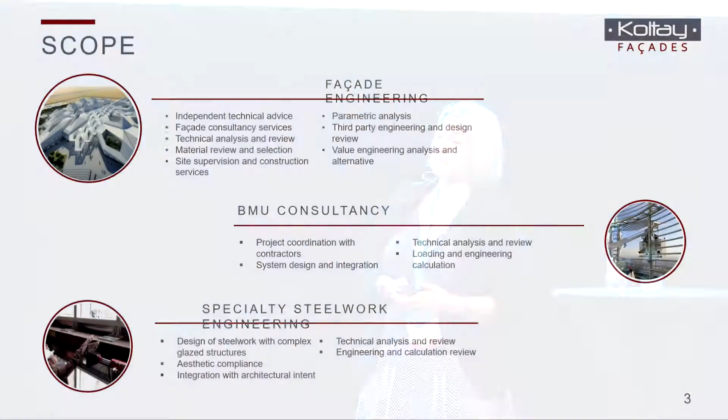Sorry, this one, Skyview. I will talk about this building today in detail. We provided full-scope facade engineering and facade access consultancy scope on this project, and this is the core business of our company. This is what we do and nothing else.

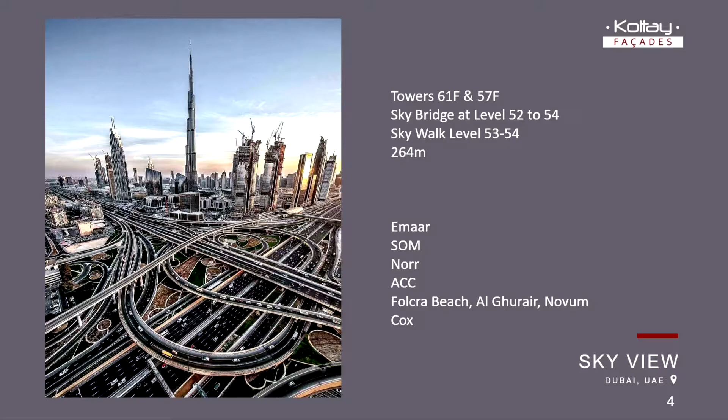Skyview is a 264-meter tall twin towers. The concept design is from SOM. The local architect was Norr, and it's an Emaar project in Dubai. It consists of 2 buildings and a giant skybridge which connects them at level 52 to 54. Our involvement on this project runs from 2013 until today. The building will get handed over at the end of this year.

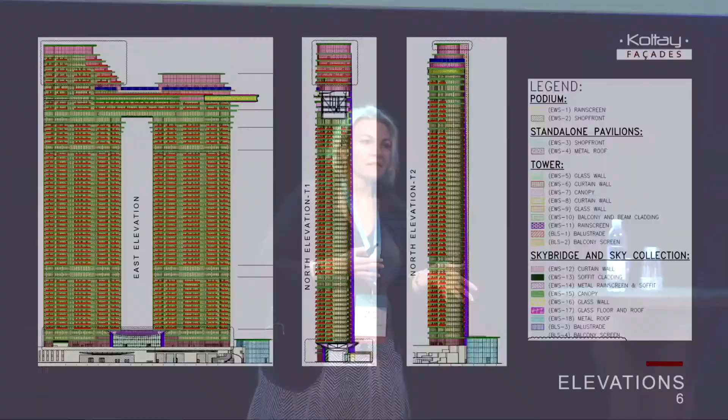How we approach every project at the beginning, we look at the whole facade and categorize it to system types. So typically on a tower building, we have like 4 to 8 system types to work with. This building, because of the magnitude of it, the complexity of it, the skybridge, the tourist feature, Skywalk on it, the car showroom next to it, the podium part, we have a lot more systems to work with.

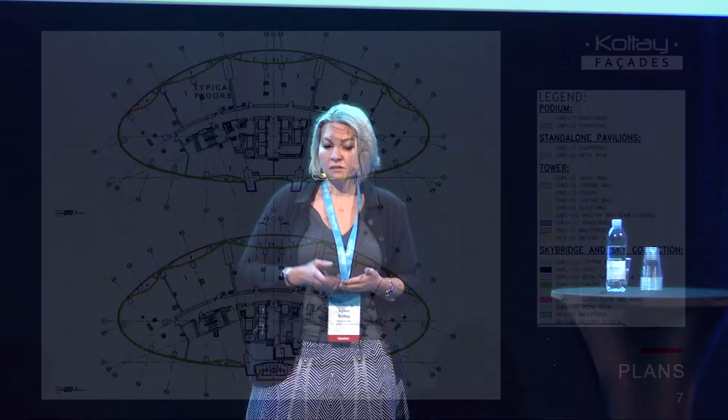This is a typical floor plate. You see little balconies eating into the floor plate. I will talk about these very narrow balconies here in a minute. This is the tourist feature. It's a glass-floored skywalk. Tourists can go and have a view on the observation deck.

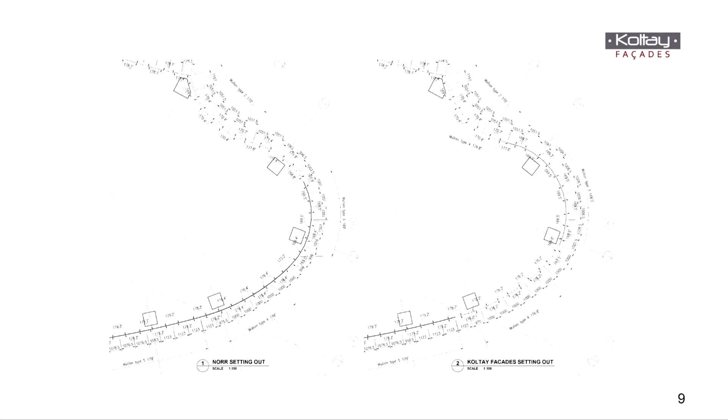This is another optimization exercise that we did at the beginning of the project, and we tend to do it on every project, to look at the modulation and to see how it fits with standard size materials, how it fits with practicality. This is a kind of a value engineering approach, which is something that we call value engineering, not something that you look at the final package and try to make it cheaper, but just to optimize the design at every step of the project to try to gain the best design for the function.

You see here on the first drawing, the original layout that we got from the architects, and on the other side, the one that got built. It basically looks the same, but there are big differences. You need 14 extrusions to build this one, and you need only 10 different extrusions to build this one, therefore much cheaper. What we did is nothing scientific, just played around with the radiuses, the meeting points of the arcs, move it around until the floor plate fits into a more optimized geometry.

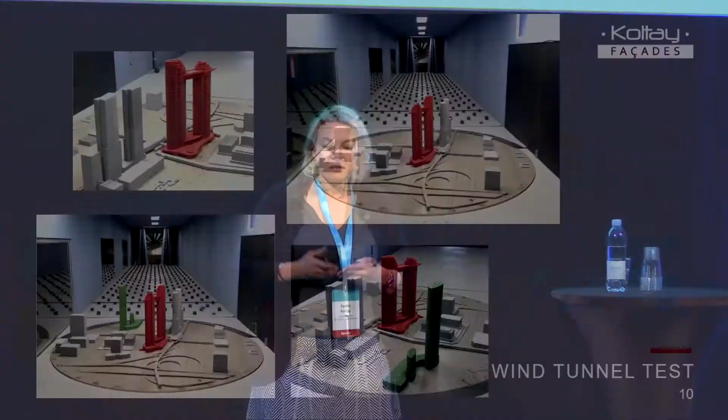Another very important optimization tool is wind tunnel testing, which obviously happens in big projects like that. On this project, it was done by RWDI, but on smaller projects, we actually have to push for it. It gives a lot of important information for the design team. We can pre-calculate and optimize mullion sizes and glass thicknesses based on this.

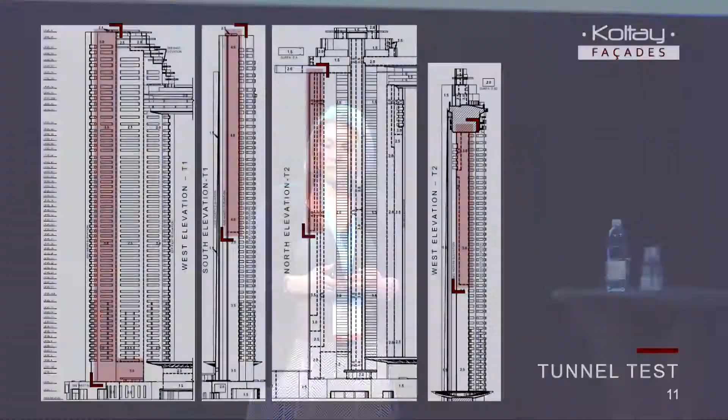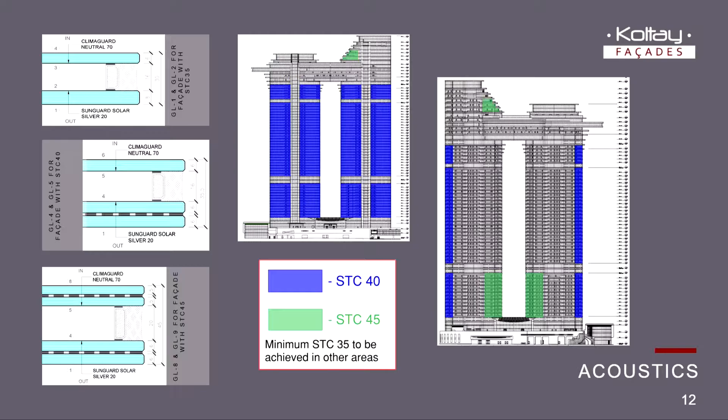The glass thicknesses may or may not vary all over the building. If it's a flat surface, you maybe don't want to play with it because you see a difference in shade. We were lucky with this building because the curvature allows for going for different glass sizes, and it was not only demanded by structural reasons, wind pressure, but also acoustics.

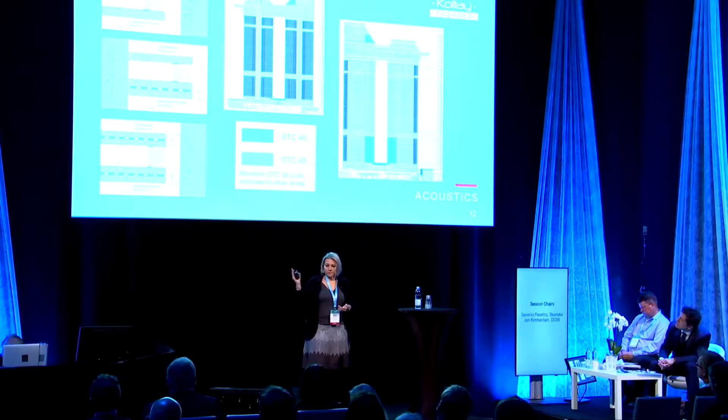The building is built in a very busy traffic junction in Dubai, and it has a public access area and also the swimming pool on the top. It's like an infinity pool. So certain areas are STC 45, STC 40, and the typical areas are STC 35.

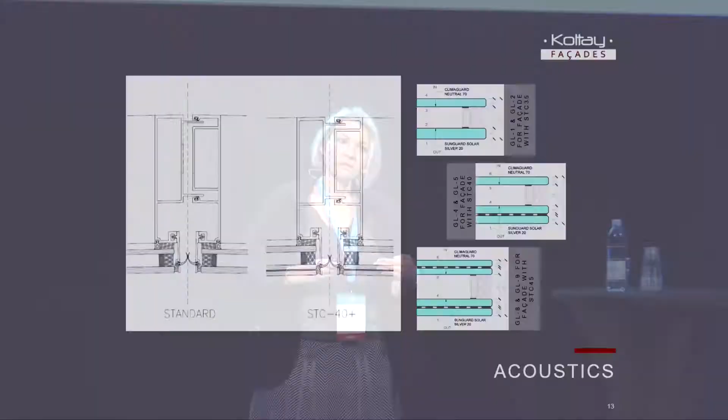This can be provided by different glass thicknesses. And then in the mullion design, you can take up that glass thickness in different ways. You can play with the air gap in the IGU, you can have different mullion sizes, or you can have adapter profiles to take this up.

The building is luckily clad with stainless steel. It's real stainless steel. There's a big difference in the final product between silver-colored aluminum-clad buildings and real stainless steel buildings. I really like the shine, the shimmer that stainless steel can provide, but unfortunately it gets value-engineered out from many projects. Skyview kept it. It's a pressed finish, which is the best for corrosion resistance.

It's a 6WL finish from Rimex. The glass is Guardian. It's Guardian float with Guardian coating. It's Silver 20 SS. Same glass that was used on Burj Khalifa, and that was a direction from Emaar, from the developer.

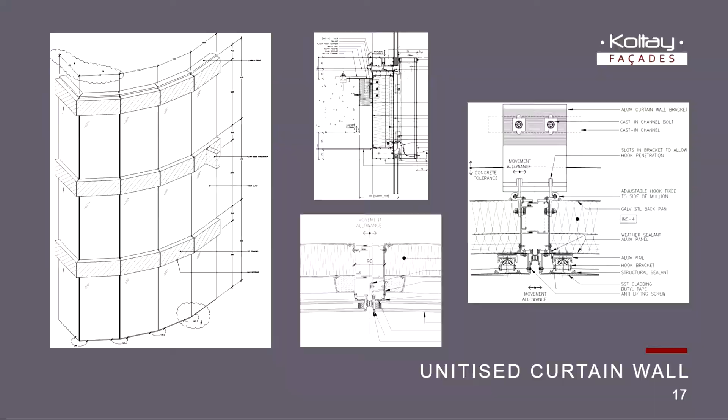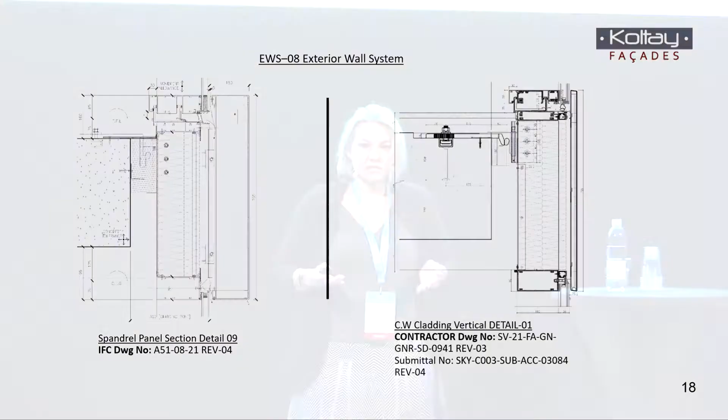So let's talk a bit about the facade systems. The building is predominantly unitized system. It consists of glazing with the stainless steel bands. And these are just a couple of drawings, the design that we provided in the tender package, and the final design that we built with the contractors. There were some modifications, some further development on this, but more or less the same concept got built.

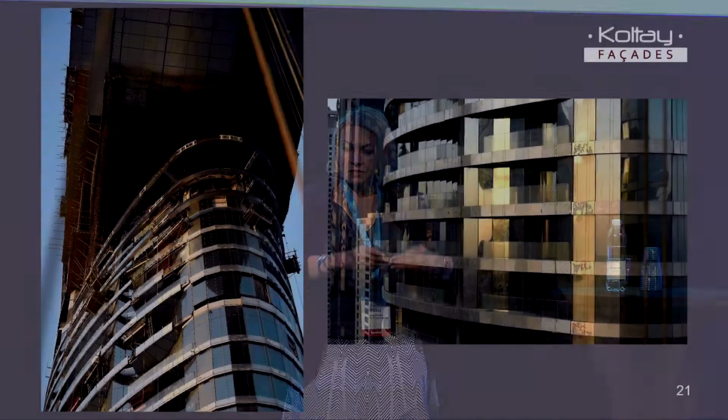Some construction pictures, bracketry, and then the balconies. So these balconies are eating up into the floor plate. The balcony doors are opening doors because of the curvature of the building. Some of the doors can open outwards, but sometimes the balcony is so narrow it has to open inwards.

You see on this picture the doors are fully glazed. It's flush glazed. It was specifically custom designed and developed for the project. It's not an existing door profile. And that brought some complexity for the inward opening door.

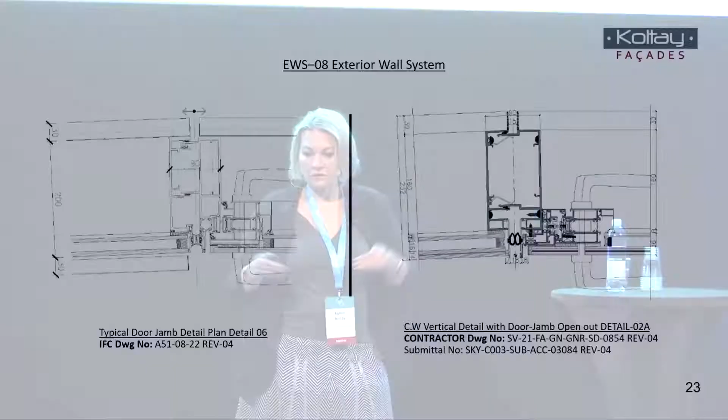So again, the detail that we tendered out and the detail that got built, some of these details got some improvement. Some of these details we had to compromise a little bit on the aesthetics to be able to build them. Like this one here, you see a bit of improvement. What got built is more glazed area and only the hinges visible. Here you see a bit of compromise. We wanted a smaller door sill than what we got at the end.

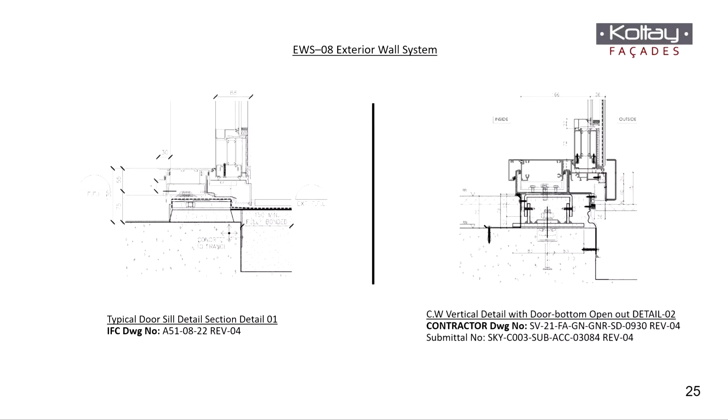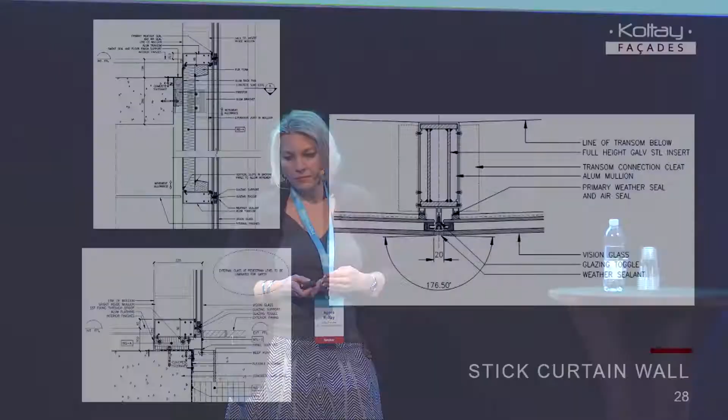So the top of the buildings, the two towers, the few floors above the skybridge, it looks like part of the tower, but in reality it's more like a little pavilion which was built on the top of the skybridge. Also, the floor plates are differing. They are getting smaller and smaller. So again, it was not very practical to use the same unitized system here. It's mostly stick system curtain walling to provide for different kinks and angles. So some details and some construction pictures.

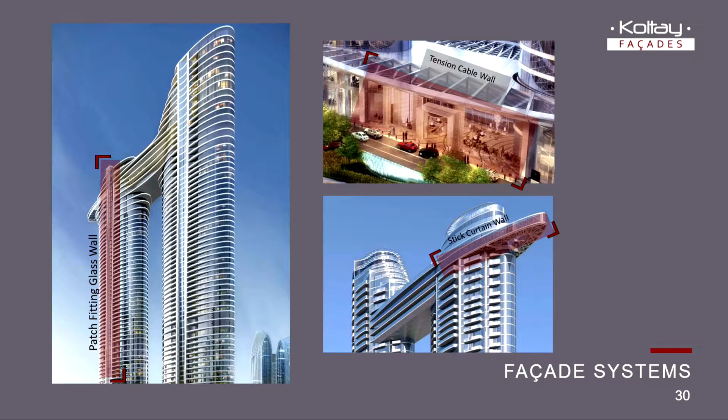Then we have some special systems on the building. There's a big panoramic elevator that takes people up to the roof bar and to the tourist attraction area. The tourist attraction area consists of different features. One of them is the glass floor skywalk. And then we have this tension cable wall at the bottom of the building on both sides. It's a very big, very transparent cable tension wall.

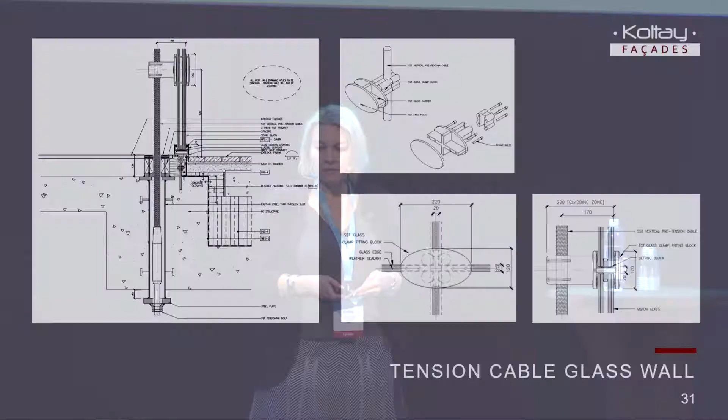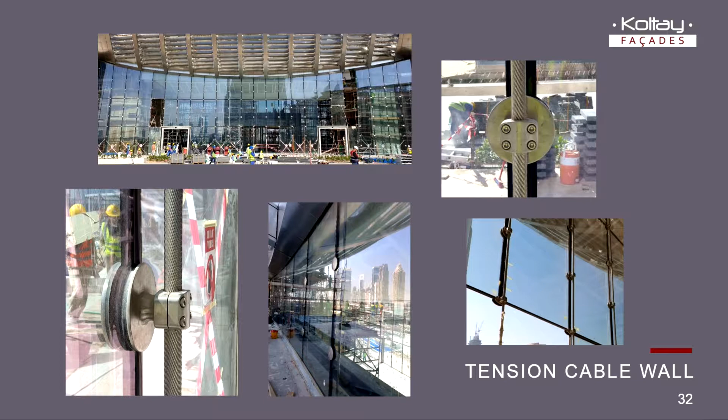So again, some details. We went for a patch fitting design on the cable tension wall. Some pictures. And the same patch fitting was specified and used at the back for the panoramic lift, but in this case it was built over structural steelwork.

The Skywalk area is basically a giant truss, and people are walking in the center of this truss. It's a construction picture. Currently, it's already glazed. Currently, there are some site water tests going on in it and finishing up the works. So you see the four members of the big truss,

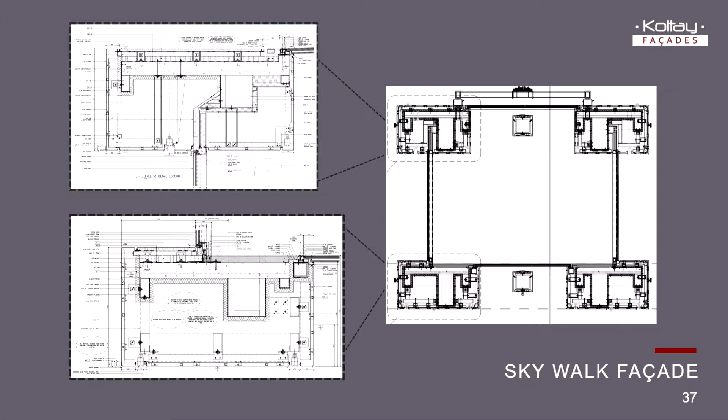and then you see a bit of additional slab here. The glass doesn't run next to the edge of the floor area. It does not really have a structural or technical reason. It's more a psychological thing for those people who are afraid of heights, to give a bit of psychological comfort. They can go and walk on the solid area.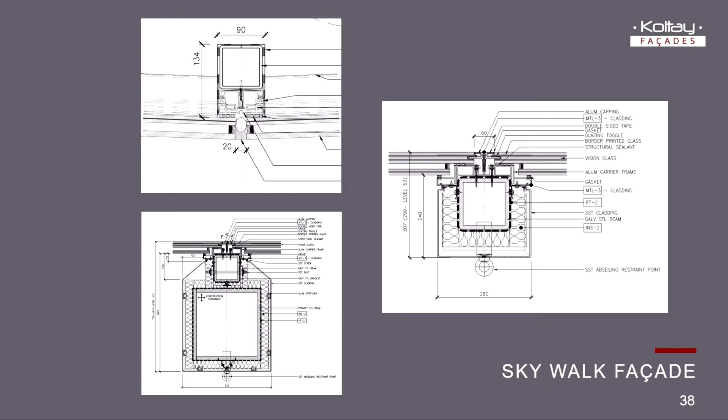Also, you see an external extension of the floor, and I will talk about that later. It's for cleaning and maintenance purposes. So some details. Obviously, it has a multiple layer laminated IGU at the floor. IGU, so we will not have condensation problems, and multiple layers, so it has enough redundancy for potential breakages, although it's calculated not to break.

And then an interesting thing, the flying beams. So the building went through a very late design review. And by very late, I mean it was already tendered out, contractors were already appointed. And the building looked like it looks on this render. And during that design review, some features were introduced.

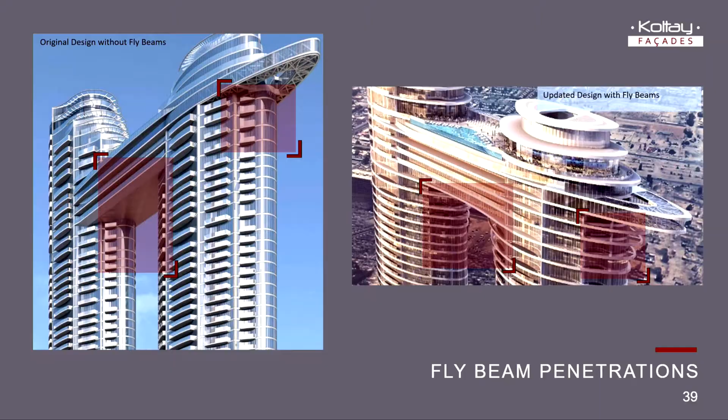Basically, the stainless steel spandrel panels are departing from the building, forming so-called flying beams. These flying beams are architecturally providing a kind of transition from the tower to the floor, and they helped the building. The building became better with this.

But every time you introduce something to the building at a late stage, it has a knock-on effect and consequences, and when you solve that consequence, it again changes something and opens new problems, and then you have to solve these. So in this case, the obvious problem it caused is the cleaning system, the BMU access. These flying beams are blocking the access of the machine below the beams. And it was not that easy to solve.

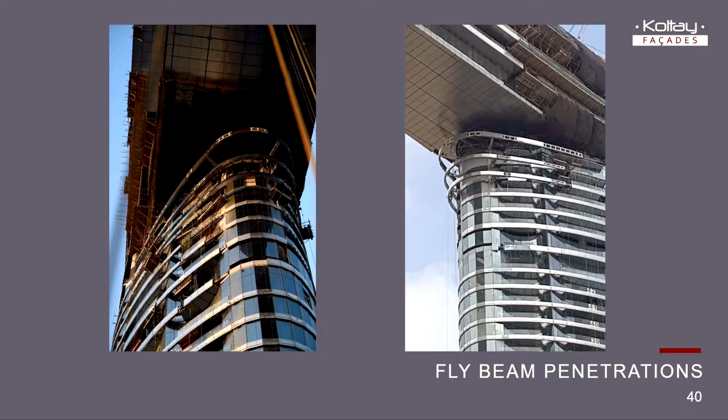So let's talk about the facade access strategy a little bit. Again, the whole area of the facade has to be reachable by some means, not only for cleaning. Cleaning is the easier part, but for maintenance, for replacing the glass. And for that, you need some kind of winch coming from somewhere, lifting the glass.

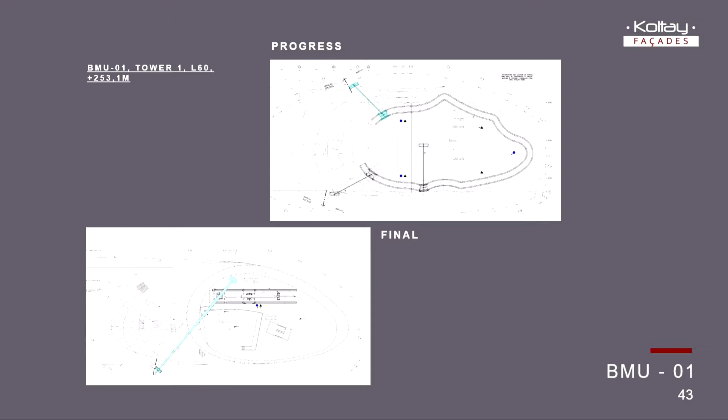So there are several BMUs on the building. Each tower has one on the roof. Here you see the progress and the final version after all the coordination with MEP and trying to optimize everything. This is what that machine looks like. And this is the BMU for the other tower, tower 1. Actually, this is tower 2.

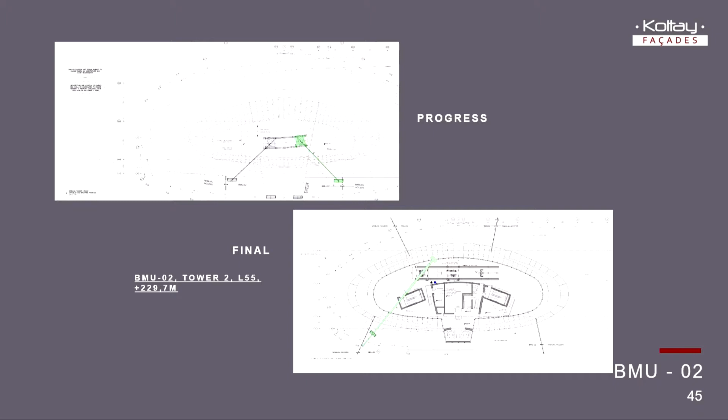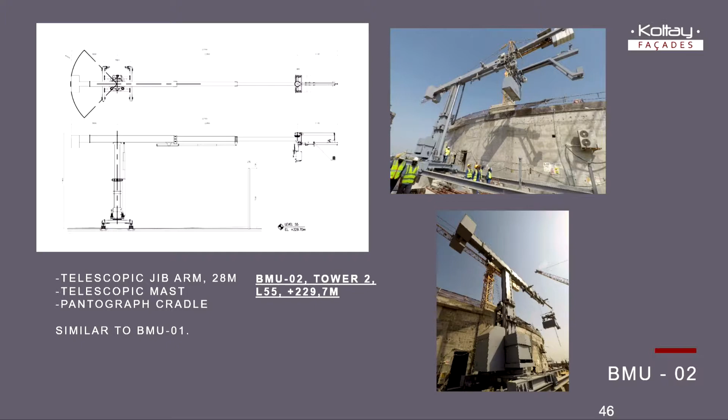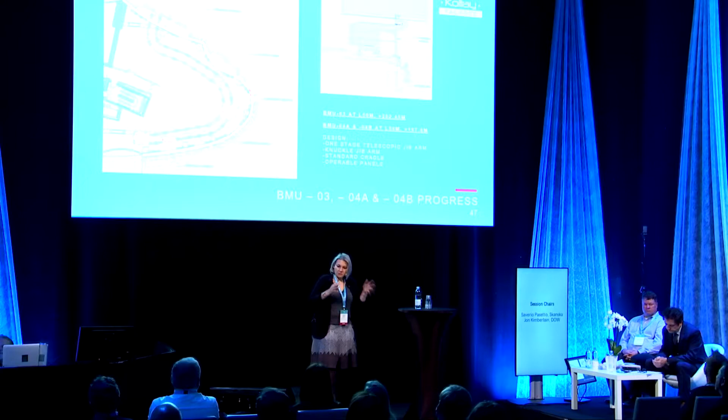And then there are additional BMU systems because the skybridge is blocking access of these roof BMU machines to the area under the bridge. This was the machine designed before the design review, before the flying beams. It was already a challenge because the skybridge has heavy truss steelwork, and that truss runs into the building to tie to the concrete core. The BMU machine has to fit through the holes of this truss work, and it was already calculated for the maximum space and optimized.

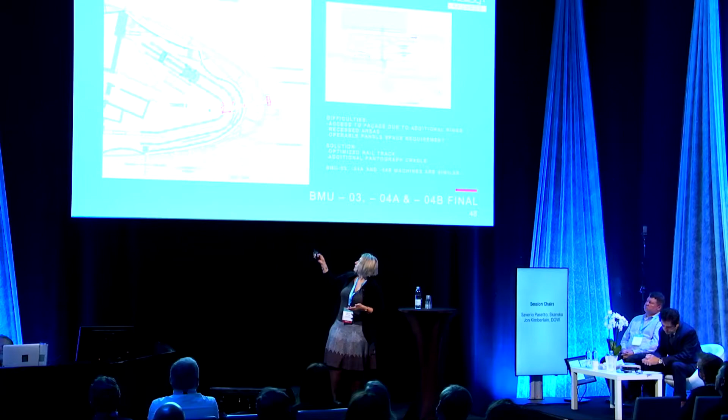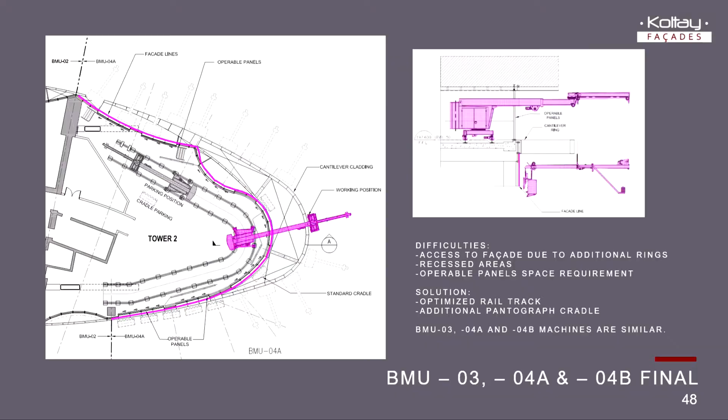When the flying beams got introduced here, we had to extend the reach, and then we had to calculate with a cradle that has a counterweight and a pantograph element that can extend under the flying beams and reach the facade. This is much heavier, it creates much more moment, so the machine size has to increase, but the machine size could not be increased anymore because it was already maximum.

So after more coordination, we managed to move the track closer to the area and to solve some of the areas, and then we had to introduce, I think, 6 more additional small systems to reach areas which could not be covered by this machine. So it brought some extra cost on the building.

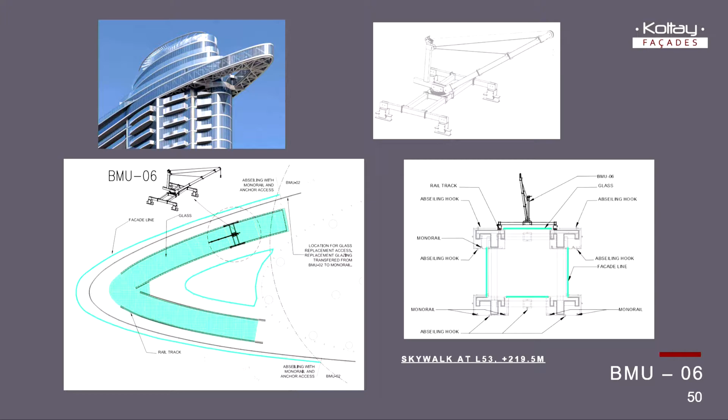This is the gantry system to reach, clean, and maintain the belly of the Skywalk area, and this is the access system for the Skywalk. For glass replacement, there's a special sled which can run temporarily on top of the Skywalk, and then they can pack it away. And for the side of the Skywalk area, we have this latch that I explained, and on top there are rails where the winch for the glass and the separate trolley for fixing the operator can run. Additional monorails for the bits and pieces.

And then finally, I would like just to show some construction images, so please enjoy with me the progress of the building. This is an earlier picture from January 2015. That's the glass mock-up, different glass types. And then the towers got built.

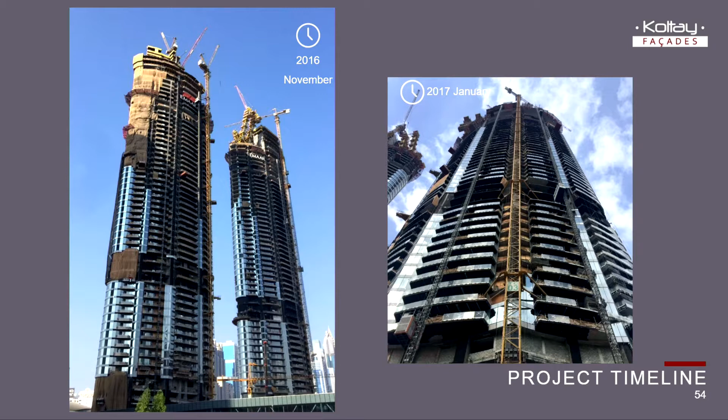And then the most interesting part happened, which was elevating the giant truss work for the bridge. The whole bridge was prefabricated in 5 pieces. They installed the 4 connection parts, and then the middle piece, which by itself was 165 tons, was lifted over the time of about a week, going up slowly.

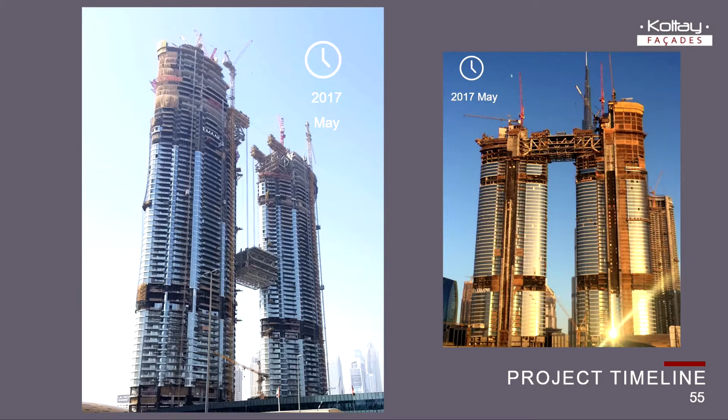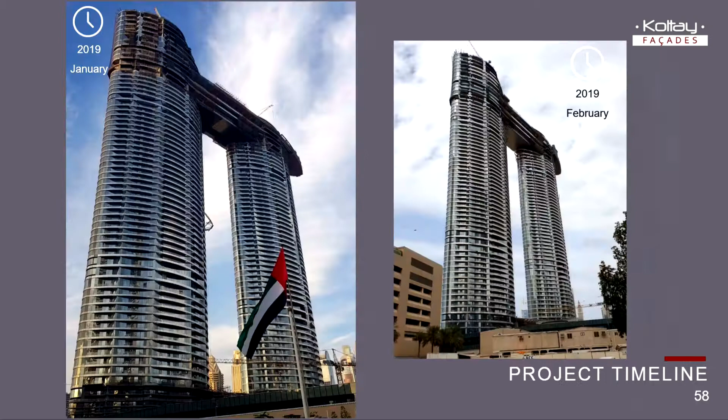We had no involvement in this part of the project. It's main structural work, but it's very interesting. So interesting that even Discovery Channel made a documentary film about it. More progress. And then some current pictures. And then I have another slide, this.

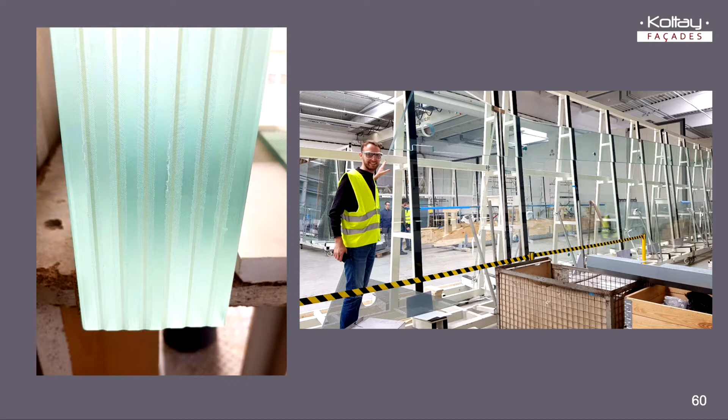This also goes on the building. This is a 7-layer SGP laminated low iron piece of glass, and then the other picture is one of my colleagues in sedak factory with a 16-meter long piece of laminated glass. These are also going to the building. It's going to be a tourist attraction, and I was really hoping to be able to talk about this part of the building in detail now.

I cannot, because although it was scheduled to be built end of March, it's not yet built, although the first pieces of glass are already on site, and we did a final load test on site with the assembled pieces last Thursday. So it will be lifted soon, and then it will be clad over. Hopefully by end of July it will be on the building. And next conference I can tell you about the design steps of this part.

Actually, it was a lot of research and development work as well. So I think there should be at least 8-10 companies in this conference who were involved in this project: sealant company, interlayer company, sedak itself. Next time. So thank you. And I don't know if there are any questions.